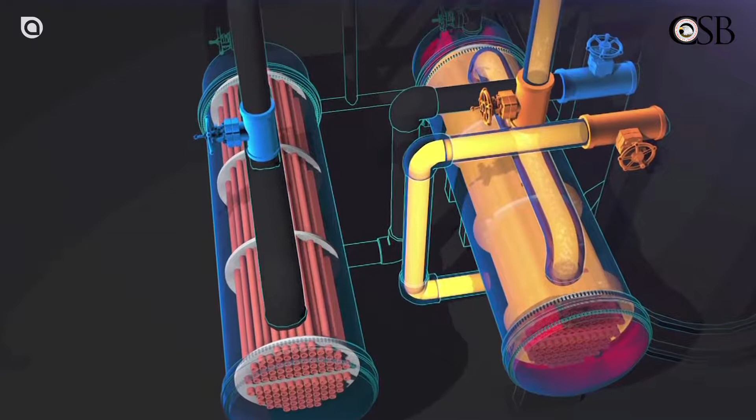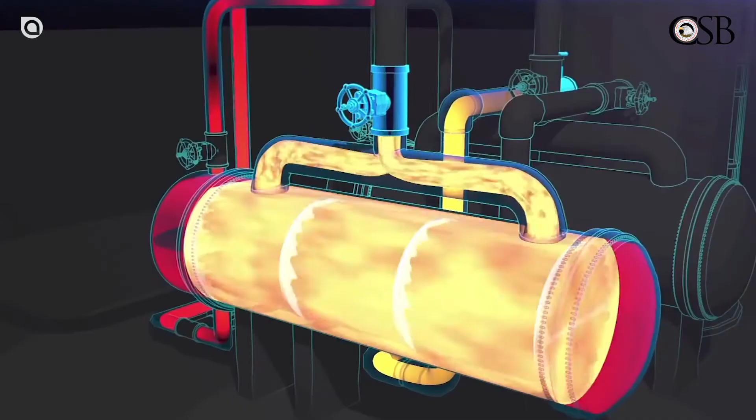On an olefins plant in the USA in 2001, a modification without proper MOC process resulted in separating two heat exchangers from their safety valves. During a maintenance operation 12 years later, one of the two heat exchangers overpressurized and exploded. 2 people were killed. Is this event process safety or occupational safety?

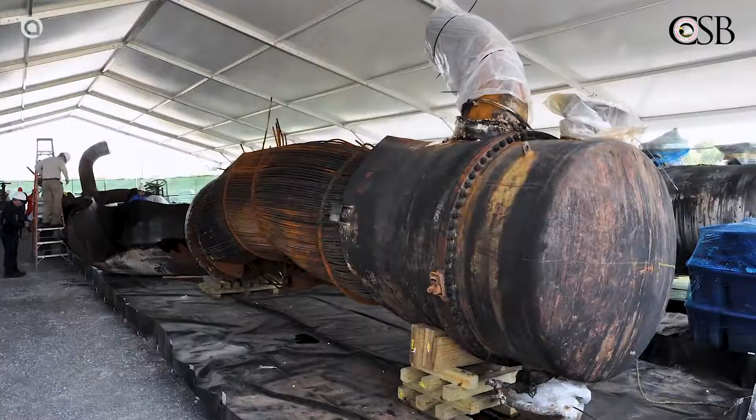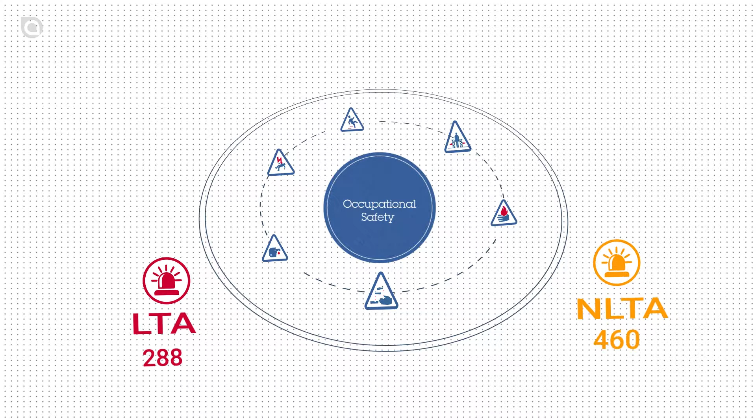There tends to be some confusion surrounding process safety and occupational safety, yet these two areas are quite different and cannot be managed in the same way. Occupational safety generates a significant number of accidents per year. It is visible, involves events such as slips and falls, cuts, burns, and can kill or injure one person at a time. You are familiar with LTA, lost time accident, non-LTA, non-lost time accident, and the frequency rate, which are used to track occupational safety. Protective measures typically include walkways, protective barriers, and PPE, personal protective equipment.

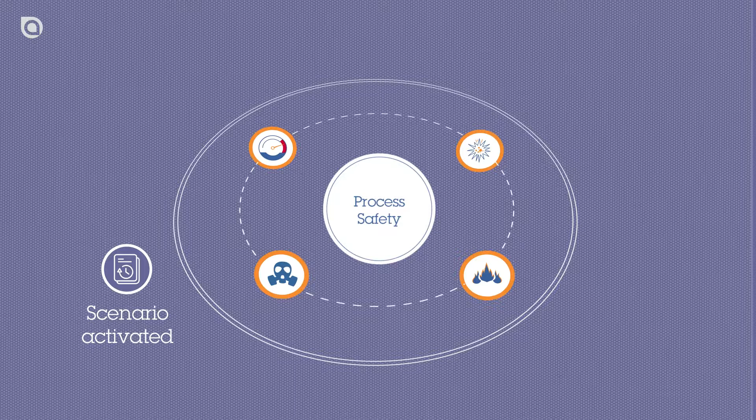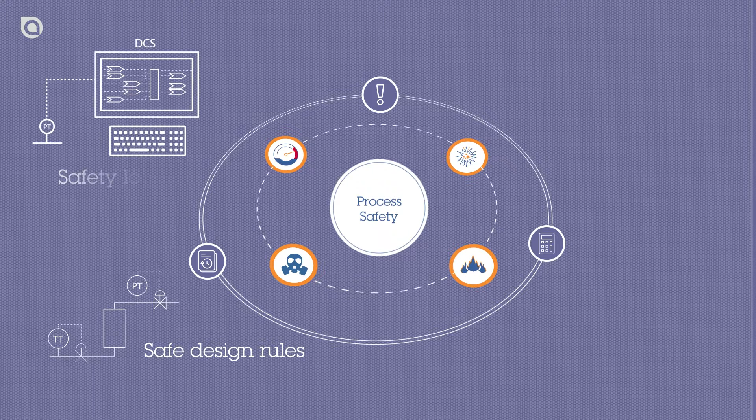On the other hand, process safety generates very few accidents per year. It makes it less visible. It involves events such as fires, explosions, toxic gas releases and pressure blasts, and can kill or injure many persons at a time. Metrics must take into account not only what has happened, but also, and above all, what could have happened, the scenario activated by the event, its potentiality of gravity, and whether we have been close to having the catastrophic event or not. Protective measures typically include intrinsic safe design rules, instrumented safety loops, SIS, and procedures that involve technical or process expertise.

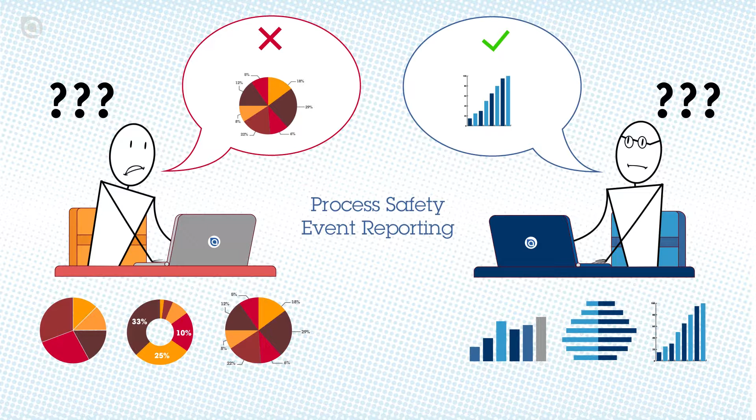So far, the process safety event reporting process is not as structured compared to the occupational safety event reporting process. General definitions are already in place, but there are still opportunities to strengthen clarity to avoid interpretations and misunderstandings. Only the more visible process safety events are reported today, and the lack of dedicated classifications does not help to get an overview of the situation, ascertain our performance, and identify trends.

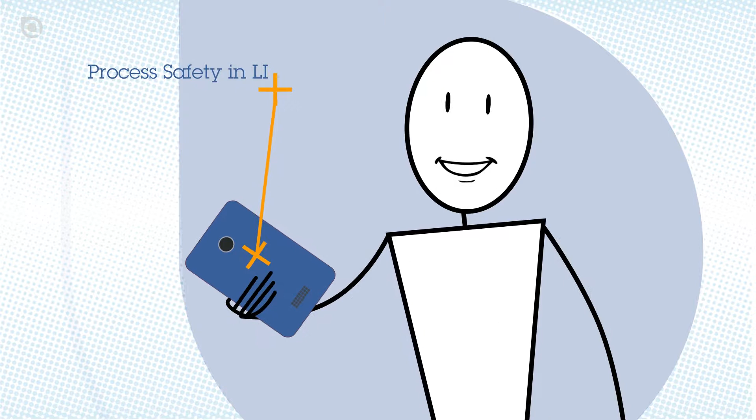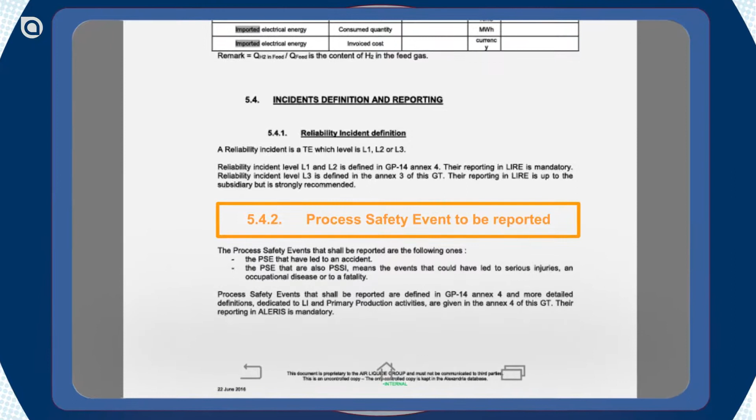To help you better manage process safety events, LI is now enriching our IMS with a section dedicated to process safety reporting process. This reporting process, supported by Revision 3 of GT PR COM 032, gives detailed definitions for process safety events in LI activities and introduces 3 essential concepts inherent to process safety events reporting and analysis. The risk segment activated by the event. Our LI activities incur typical risks, which are supposed to be under control. It's important to know which risk the event falls under.

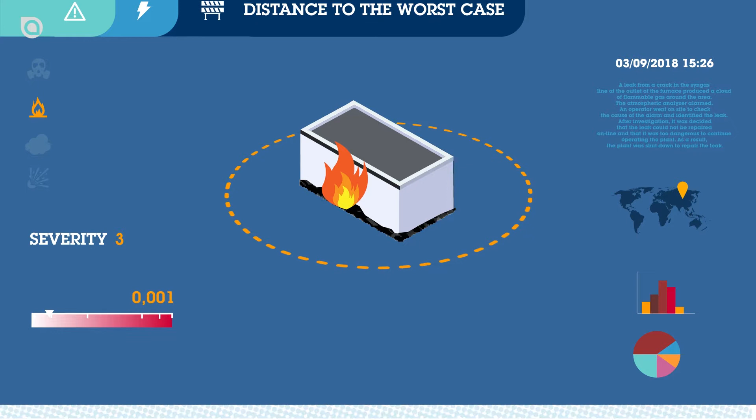Actual potential severity of the event. Fortunately, our process safety events have not had any consequences, but they have not all had the same potential severity. This is the reason why it's important to assess what could have happened if the scenario had reached the maximum level of severity, called worst case. Distance to the worst case: together with the notion of potential severity, the notion of distance of the actual event to the worst case is central to the process safety culture. This is the feeling we get when we know we were close to having an accident. We were lucky.

Thanks to the introduction of this new reporting process dedicated to process safety, LI will now have a common framework for communicating, sharing, and capitalizing on process safety events. It will allow people across the globe to speak the same language, enhancing the process safety experience worldwide, and allow us to follow up on weak signals and identify process safety priorities at every level of the organization. Let's take another step towards even safer operations.